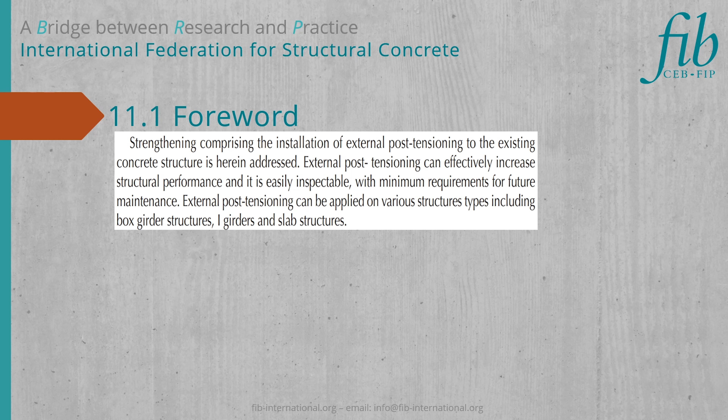This method is particularly suitable for existing road bridges. These structures should be regularly inspected and assessed to ensure that the structural elements are adequate to resist increasing traffic load and structural deterioration over time. Once elements have been identified as having insufficient load carrying capacity, there is a requirement to either strengthen or replace the structure in order to maintain the safe operation of the road network.

Where strengthening is required, the most appropriate form of strengthening will need to be assessed. External post-tensioning may be chosen as an appropriate method, particularly where deficiencies are found in existing post-tension structures. It can significantly increase the structural performance of a structure while minimizing further strengthening requirements.

Strengthening by external post-tensioning is appropriate for various types of cross-section, including box girders and concrete composite structures. The method can be applied to strengthening midspan regions and both internal and end support areas. The critical cross-section stress state can be actively influenced by post-tensioning, which is its primary advantage over other strengthening methods, where the structure is strengthened passively by attaching additional structural members to achieve higher resistance.

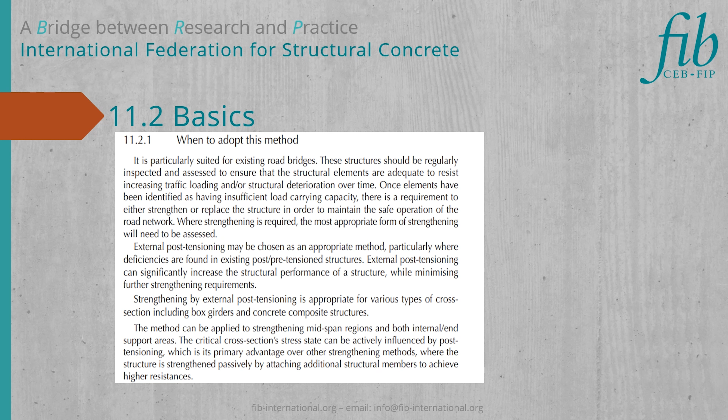Strengthening by external post-tensioning can introduce additional force which can increase the resistance of the section while reducing long-term deflections and crack widths where cracking has occurred. Using external post-tensioning can minimize crack widths or permanently close them, which is likely to improve the structure's durability.

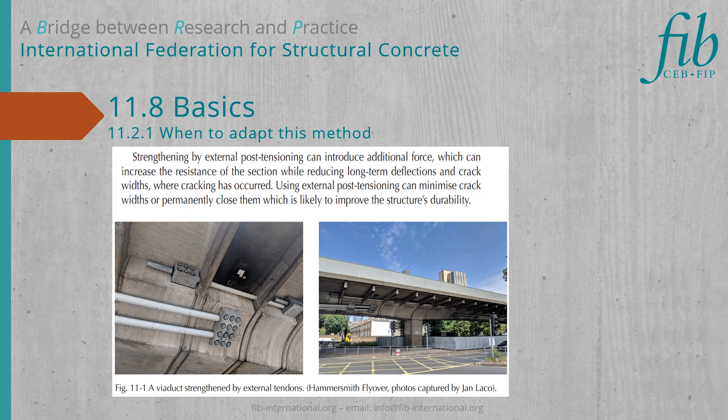Complex pre-stressing systems comprise numerous elements required for the successful distribution of pre-stressing force into the structure. The elements required for external post-tensioning are high tensile strength steel strands or wires with 1770 or 1860 megapascal strength. Pre-stressing strands and wires can be either bare or greased and sheathed.

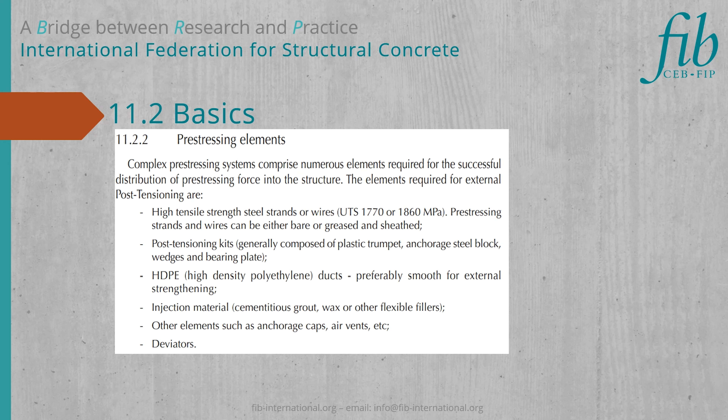Post-tensioning kits generally comprise plastic trumpet, anchorage steel block, wedges and bearing plate, HDPE ducts, preferably smooth for external strengthening, injection material which can be either cementitious grout, wax, or other flexible fillers, and other elements such as anchorage caps, air vents, and deviators. All pre-stressing systems must have valid certificates, for example ETA.

The pre-stressing equipment as well as the bursting steel reinforcement placed behind the anchors are also subject to certification.

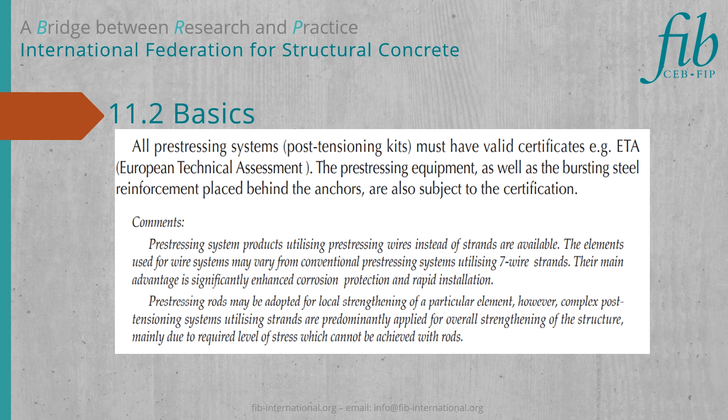Pre-stressing tensile elements must conform to national standards, and it is generally recommended that low relaxation steel with up to 2.5% relaxation is used. Typical strand diameters are 12.7 or 13.2 millimeters, which is equivalent to 0.5 and 0.52 inch, and then 15.24 or 15.75 millimeter, which is equivalent to 0.6 or 0.62 inch.

The strands can be individually protected by grease and plastic sheaths depending on national requirements. Also, a wide range of other strand dimensions and arrangements are currently available on the market. Compacted strands with a greater cross-sectional area utilizing standardized strand diameters can be used to achieve greater allowable pre-stressing force. It should however be noted that non-typical diameters and strand arrangements are rarely used for structural strengthening.

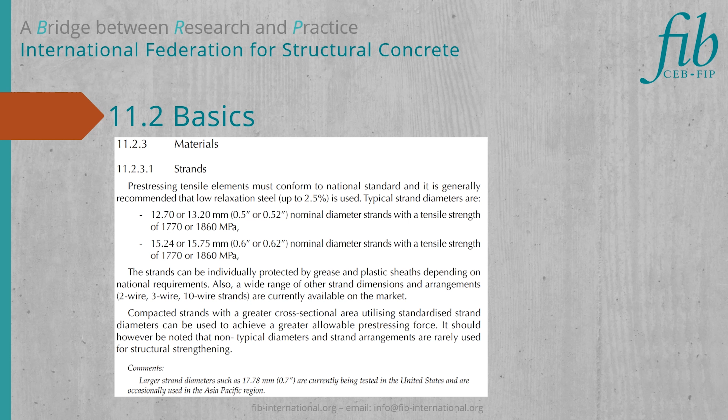Pre-stressing systems are complex systems comprising various elements, and it is not permitted to mix particular elements from various suppliers. Therefore, for each job, a specific post-tensioning system supplier needs to be procured, which then provides the system for the whole structure. It is not permitted to mix various elements from various suppliers to achieve the results.

Each pre-stressing system needs to be certified, and the certification is typically carried out for an entire pre-stressing system rather than individual standalone components. So components provided by one supplier but from various systems cannot be mixed, even though all its parts have been individually certified.

Let's talk about anchorages a bit. Anchorages can be either active or passive. An active anchorage allows stressing of the pre-stressing unit, whilst a passive anchorage allows only tendon anchoring without the option to stress, de-stress, or re-stress the tendon.

Currently, anchors for 1 to 55 7-wire strands are readily available worldwide, as well as anchorages for wire and rod systems.

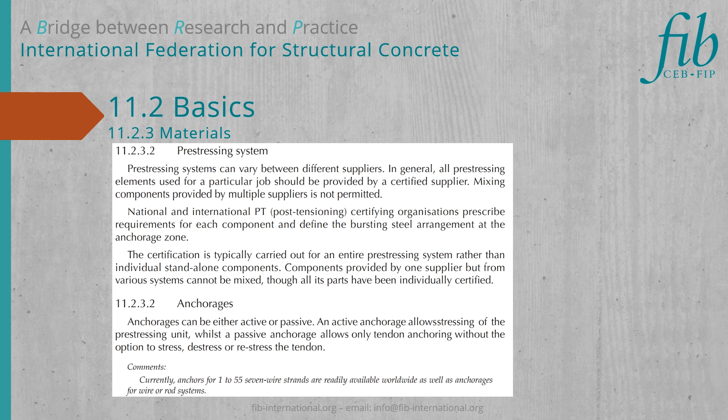Smooth surface HDPE ducts are predominantly utilized for external post-tensioning. The ducts used for PT should comply with national standards. Smooth HDPE ducts are usually produced in a factory and welded on site to achieve the required length.

Pressure nominal class defines maximum allowable internal pressure in bars acting on the walls of the duct.

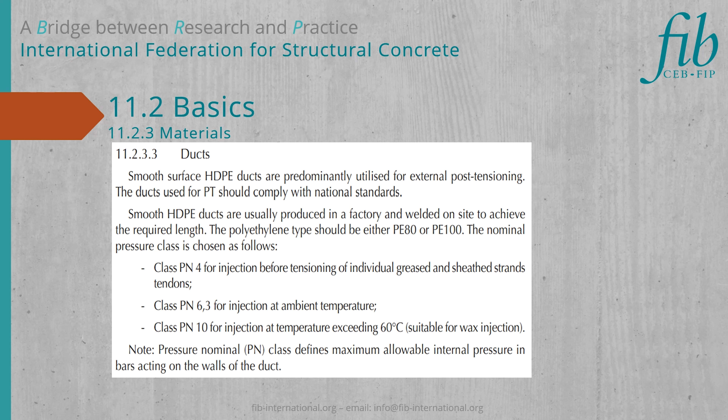The ducts need to be filled with protective material against corrosion, which can be cement grout. Cement grout mixes must be certified and compliant with national standards. Suitability tests for grout properties, such as volume stability, fluidity, and chemical composition, should be carried out in accordance with relevant documents and comply with national requirements.

Or the ducts can also be filled with some kind of wax or grease, which depends on national requirements and regulations. The wax must be compliant with the relevant standard for pre-stressing cable injection, and flexible fillers such as gels, thixotropic compounds, and other water blocking agents are currently available within the PT industry for cable injection.

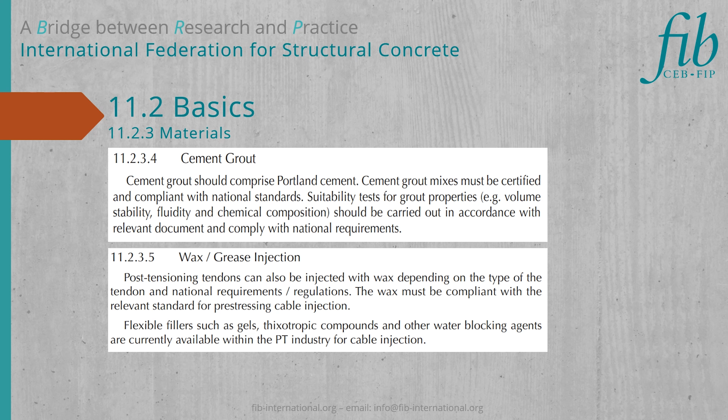Now let's talk about pre-stressing equipment. All equipment and methods used for tendon installation, tensioning, and injection must be specified and carried out by certified post-tensioning suppliers. The stressing kits are generally defined by the certifying organization. The equipment required for pre-stressing installation is the following: welding machine for HDPE ducts, threading machine, which can also be called a strands pushing machine, jack and pump for tensioning operations, injection pump, and container for grouting material.

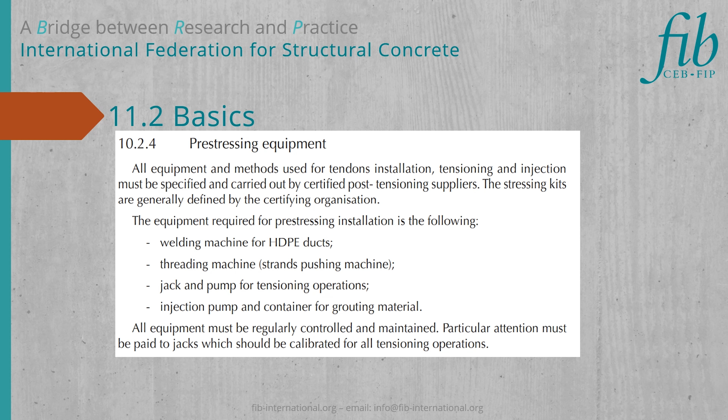All equipment must be regularly controlled and maintained. Particular attention needs to be paid to jacks, which should be calibrated for all tensioning operations.

Let's talk about stakeholders, their roles and qualifications. Let's start with the owner. The structure's owner should provide all relevant available information from previous interventions, assessments, original design project, and construction records. The owner may also specify additional requirements for service life of the strengthening elements, such as minimum or increased structural performance, durability of the strengthening elements, warranties, minimum disturbance of the structure service during interventions, and similar. The owner is also responsible for quality control measures, inspections, monitoring, and maintenance.

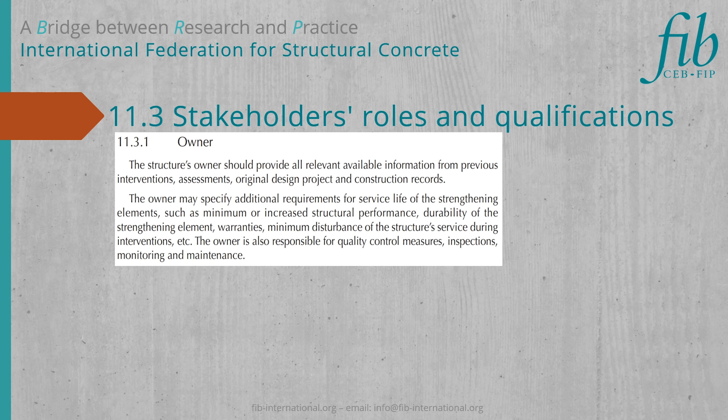The next stakeholder is the designer. The designer should be experienced in design assessment of post-tension concrete structures and bridges pre-stressed by external tendons. The designer should be able to carry out the structural analysis, which should adequately quantify the loading within the structure, compared to the calculated resistance of the structure, considering both the strengthened and unstrengthened condition. The text says should, but basically this is a must.

The design procedure is dependent on the existing condition of the structure, and therefore a thorough inspection report must be available for the design. An understanding of the overall structural behavior is essential to carry out the design of the strengthening by external tendons. An important aspect of the overall strengthening is the design of attaching elements, such as anchorages of the tendons and tendon deviators, as these elements must be attached to the existing structure and therefore require particular attention to ensure that the existing structure is not overstressed or even damaged.

Also key to the design is the development of a detailed construction sequence, as the addition of external tendons changes the stress state of the existing structure, which may be well in excess of the compression resistance of the concrete. This is particularly of concern where the condition of any existing tensioning systems is unknown. In this case, it may be necessary to cut the existing tensioning systems during the staging of the works to ensure that the stresses within the structure can be controlled.

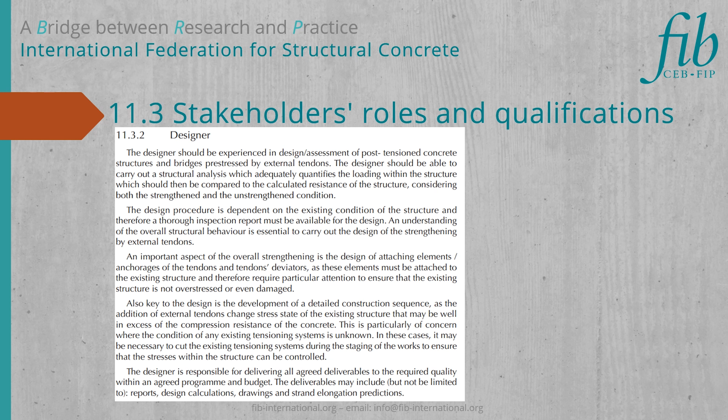The designer is responsible for delivering all agreed deliverables to the required quality within an agreed program and budget. The deliverables may include, but not be limited to, reports, design calculations, drawings, and strand elongation predictions.

Let's speak about the contractor. Only a contractor certified for post-tensioning installation work is allowed to carry out strengthening works utilizing external tendons. The anchoring and strand geometry deviating elements must be attached to the existing structure, and therefore the work must be carried out with prudence.

The contractor should provide all devices for the tendon installation and is responsible for their operability. The contractor is also responsible for the compliance of the materials used in the installation process regarding those proposed within the design specification.

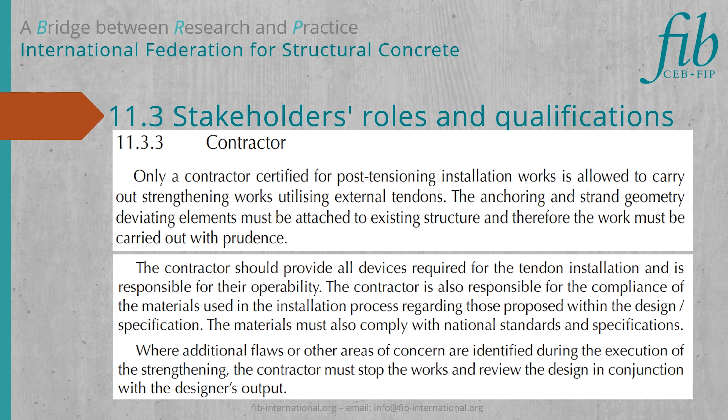Prior to strengthening measures being proposed, an assessment of the structure must be carried out. The purpose of the assessment is to identify critical areas of the structure which should be subjected to strengthening. The design must consider both the original and strengthened state of the structure. The assessment should consider future load prediction where it is possible to do so, for example, allowance for flexible lane configurations on bridges. The assessment must be carried out in accordance with standards agreed with the owner.

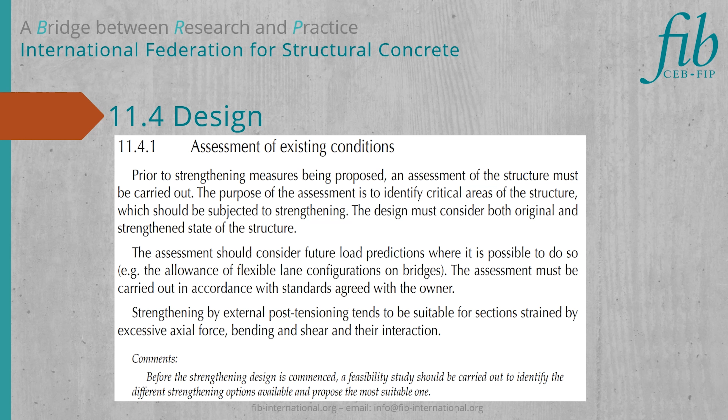Strengthening by external post-tensioning tendons is suitable for sections strained by excessive axial force, bending, and shear, and their interaction. Design standards require reliable service of the structure throughout its lifetime, and any proposed strengthening should therefore not detrimentally affect the service life of the strengthened structure.

Where strengthening elements are not replaceable, the durability requirements are more onerous. The service life of non-replaceable structural elements must be at least the same as the remaining service life of the strengthened structure.

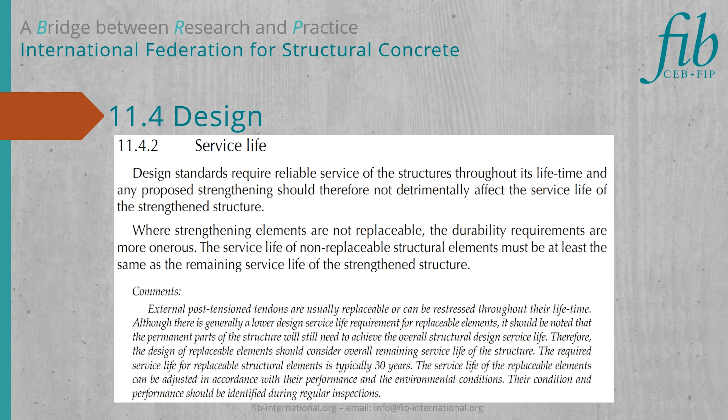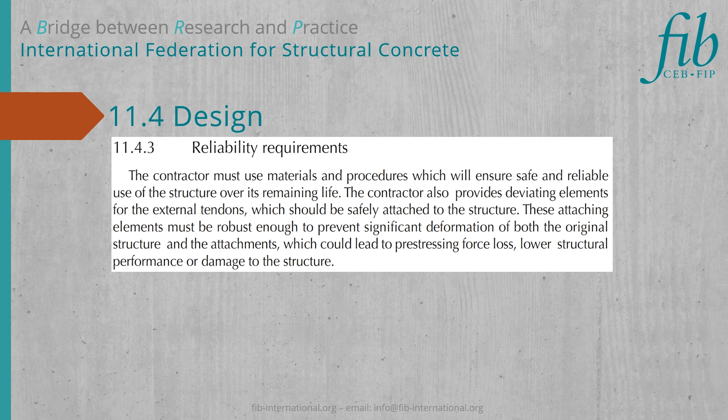The contractor must use materials and procedures which will ensure safe and reliable use of the structure over its remaining life. The contractor also provides deviating elements for external tendons which should be safely attached to the structure. These attaching elements must be robust enough to prevent significant deformation of both the original structure and the attachments, which could lead to pre-stressing force loss, lower structural performance, or damage to the structure.

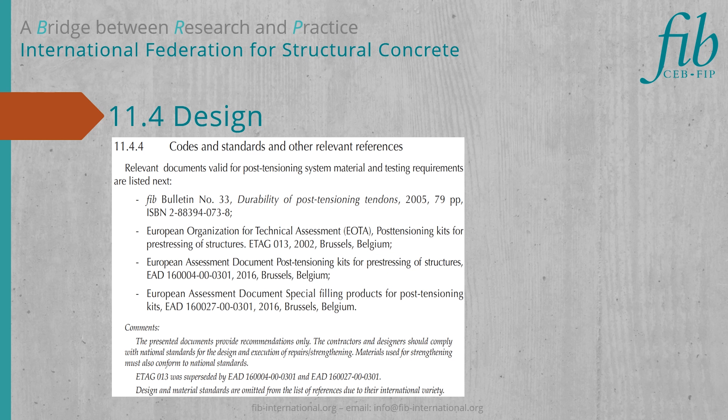Some of the documents which may assist with external post-tensioning design are shown in this slide.

Let's summarize the design assumptions. The bending effects introduced by external tendons should act in the opposite direction to the permanent and transient loads on the structure. The bending resistance of the section should therefore increase due to bending effects introduced by attached tendons. Secondly, the axial force introduced by additional external tendons can either increase or decrease the bending resistance of the section.

The critical section should be verified as a section strained by axial force and coexistent bending moment. Thirdly, additional elements such as deviators and tendon anchorages should be attached to the structure without affecting structural integrity, resistance, serviceability, and durability. Fourthly, all stages of the proposed construction sequence should be adequately assessed, as intermediate stages can have significant detrimental effects on the structure. And last but not least, creep due to additional pre-stressing force should be calculated in order to determine its effect on bearings and expansion joints.

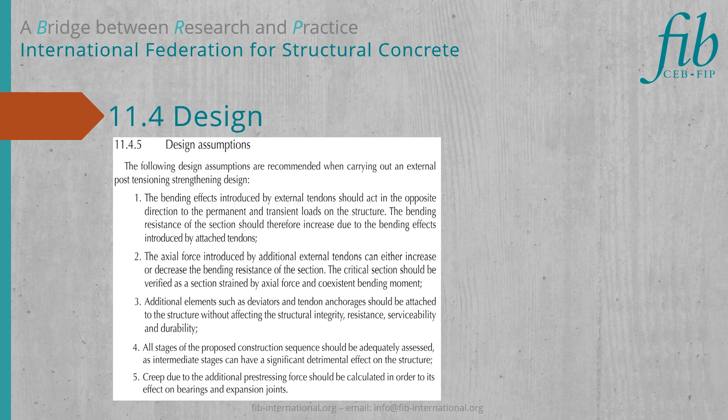Once it has been identified that strengthening of the structure is required and external post-tensioning has been chosen as the preferred option, the design of the strengthening elements should be carried out. The designer should bear in mind all the assumptions listed above. Another key factor is ensuring that adequate consideration is given to the difference in the tendon static behavior between bonded and unbonded tendons.

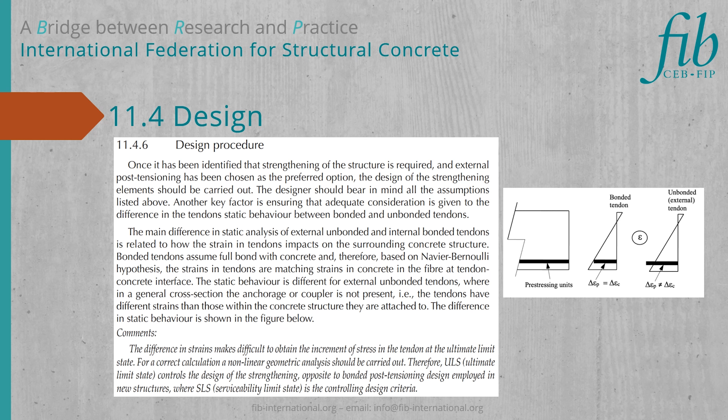The main difference in static analysis of external unbonded and internal bonded tendons is related to how the strain in tendons impacts the surrounding concrete structure. Bonded tendons assume full bond with concrete, and therefore the strains in tendons match strains in concrete at the tendon-concrete interface fiber. The static behavior is different for external unbonded tendons, where in a general cross-section the anchorage or coupler is not present. The tendons have different strains than those within the concrete structure they are attached to. The difference in static behavior is shown in the figure.

The attached external tendons can be either straight or deviated. It is more difficult to construct deviated tendons, although they have more beneficial static behavior. In some cases, it may also be necessary to include deviators to avoid overstressing the concrete within parts of the structure. Another disadvantage for external tendons is the loss of eccentricity due to structure's deformation, where intermediate tendon deviators, reflecting the structure's deformed geometry in the midspan area, are not provided. To examine the loss of eccentricity, a geometric nonlinear analysis should be carried out.

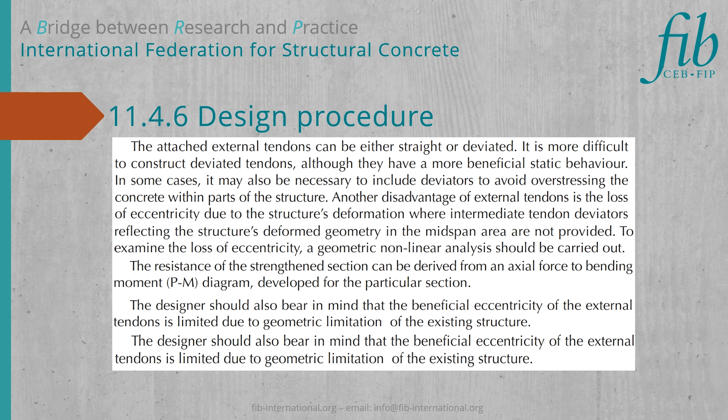The resistance of the strengthened section can be derived from an axial force to bending moment, or so-called PM diagram, developed for the particular section.

In addition to this, when the structure being strengthened is an existing post-tension structure, careful consideration of the existing tendon condition needs to be made, particularly if an inspection has found deterioration of the existing strand. In these circumstances, the precise damage of the existing tendons is often unknown, and whilst it is common to design the new strengthening for the worst-case scenario, where a maximum number of tendons are damaged, it should also consider the best-case scenario where a minimum number of tendons are damaged to ensure that the new strengthening will not cause overstress within the existing structure.

The installation of deviators and anchorage may also cause temporary weakness of the structure while these elements are being connected. This temporary weakness should also be considered, particularly where it may have a significant impact on overall structural performance.